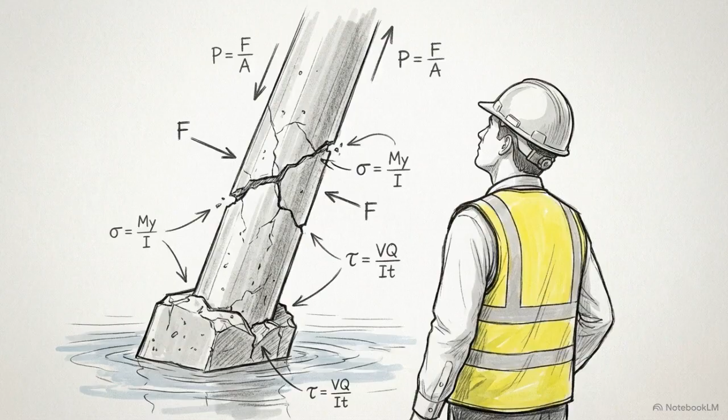When severe floodwaters overwhelm a Thai municipality, volunteer engineers deploy directly into the disaster zone to assess the structural and electrical safety of the remaining buildings. The physical disruption is massive. Whole districts are submerged in highly conductive mud, roads are washed out, and infrastructure is completely compromised.

Parallel to this physical chaos is a strict administrative reality. The Thai Council of Engineers requires its members to accumulate a rigid sum of Continuing Professional Development, or CPD, units. CPD is a mandatory system of education and fieldwork credits required to advance an engineering license from the associate level to the professional or senior tiers. Starting in 2025, that requirement locks in at exactly 150 units.

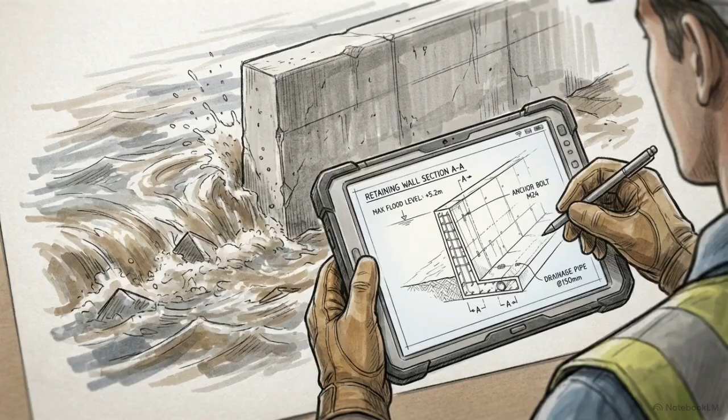That specific number is dictated by international agreements. Accumulating 150 units is the exact threshold required to maintain standing in the Washington Accord and hold the title of APEC Engineer, a recognized international standard that allows for cross-border professional mobility. Executing rapid field diagnostics in a flood zone and calculating bureaucratic CPD multipliers in a portal are two halves of the exact same professional survival requirement.

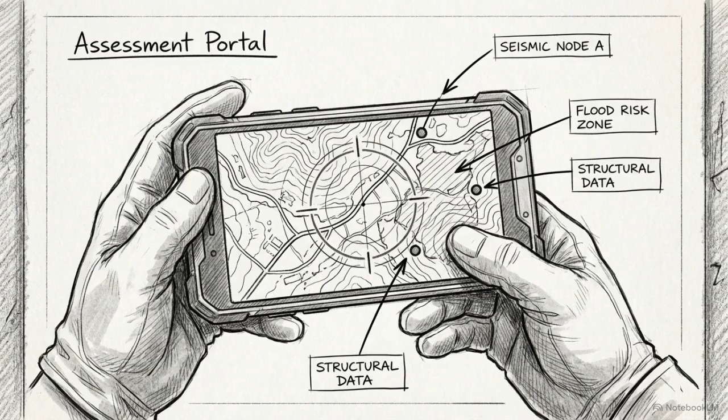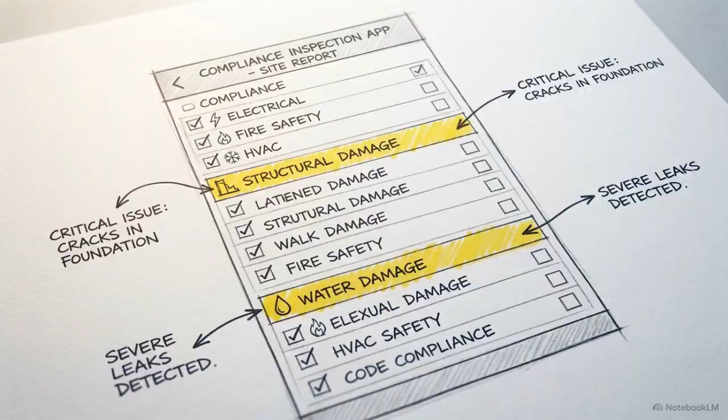Upon entering a compromised area, an engineer's workflow relies on a centralized assessment app. They drop a precise GPS pin, upload photographic evidence, and log the specific visual damage of the structure. The software processes this data into a standardized triage map, assigning a binary safety classification of red, yellow, or green to every surveyed building. This creates immediate friction in the field.

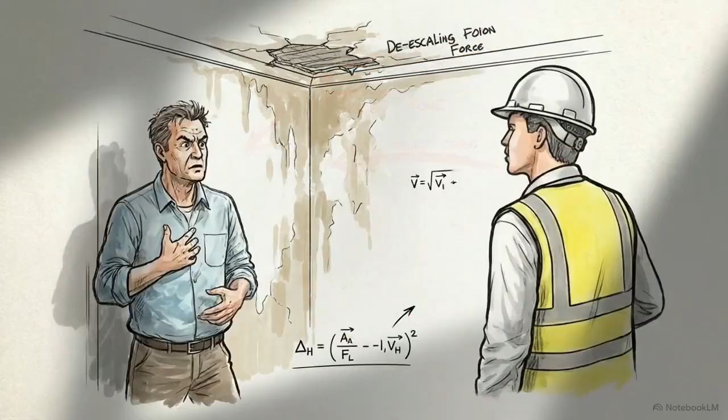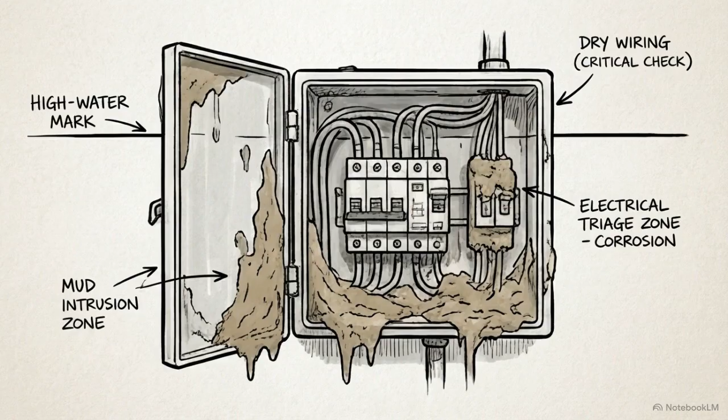As floodwaters recede, like in the recent Chiang Rai deployments, the most immediate threat shifts from drowning to electrocution. The primary diagnostic target inside any residential building is the main electrical consumer unit, which is typically found inundated with thick, conductive mud. This creates a macro dependency problem. The provincial utility company will refuse to reconnect power to an entire street until every single individual consumer unit on that block is cleared and certified safe.

Engineers must manually flush the mud from the panels and perform insulation testing using a megohmmeter. A megohmmeter is a specialized instrument used to measure the electrical resistance of insulators. Only a passing resistance value allows the unit to be cleared. Digital data entry is useless without this physical intervention. The municipal grid cannot function until the hardware is manually secured.

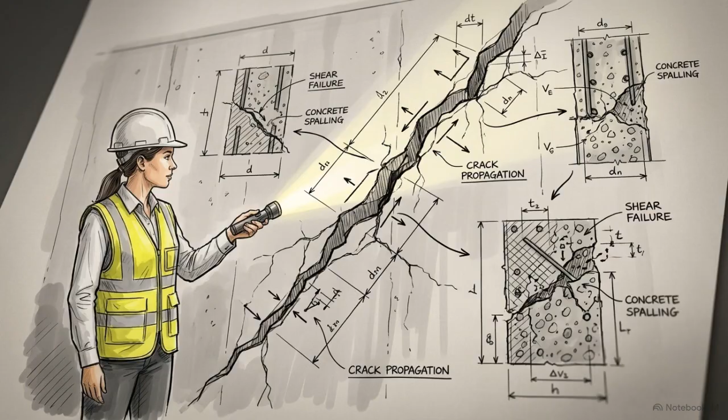Once the electrical risk is neutralized, the triage shifts to the structural integrity of the walls and foundation. Surface cracks in concrete and masonry dictate the hidden failure mode of the building. The orientation of a diagonal fracture is entirely deterministic. It follows strict geometric rules.

Here is how you read the geometry. If you draw a perpendicular vector line outward from a diagonal crack and point it downward, that line will aim directly at the failing foundation element.

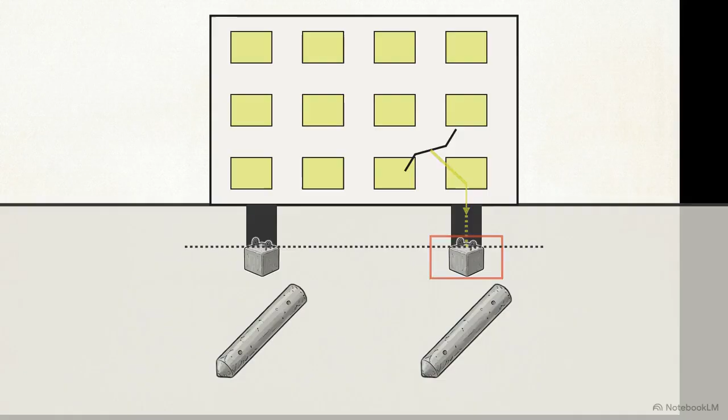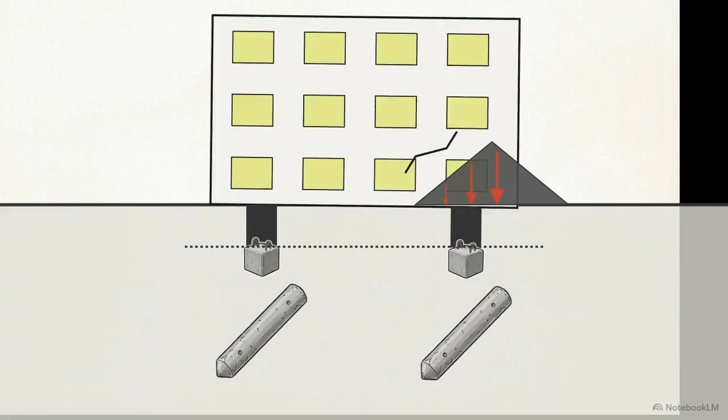In one field case study of a 3-story building, this exact vector analysis pointed to a specific footer, revealing severe differential settlement on one side of the structure. The mechanical cause was hidden underground. A massive, unrecorded volume of sandfill had been dumped over a short 6-meter pile to level a parking area, completely overloading its bearing capacity and crushing it downward. The surface-level architectural cracks act as a direct, readable map of these hidden subsurface failures.

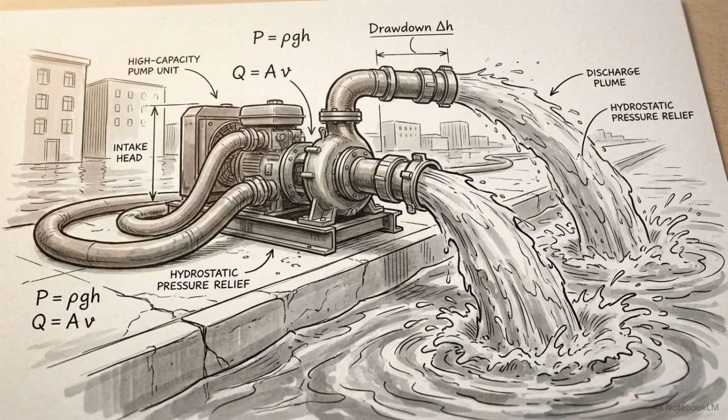The third major failure category occurs outside the building entirely: geotechnical slips along community canal banks. The physical trigger is often the rapid drawdown of floodwater, usually through aggressive pumping. This instantly removes hydrostatic pressure, the outward force exerted by the resting fluid, causing the heavy, saturated soil to flow outward into the empty canal. The primary visual warning sign is the sudden appearance of longitudinal tension cracks on the asphalt road surface, running perfectly parallel to the waterway.

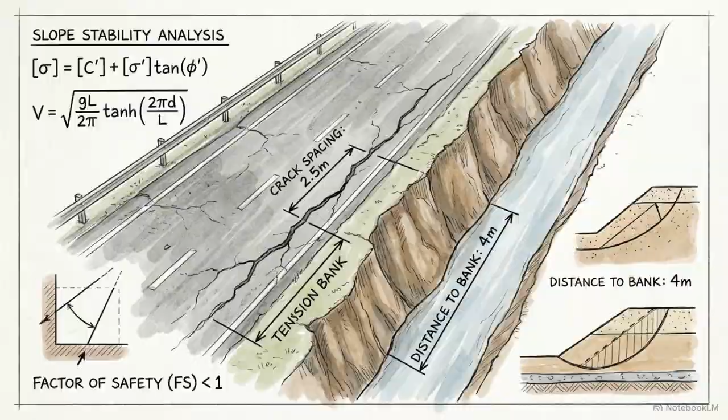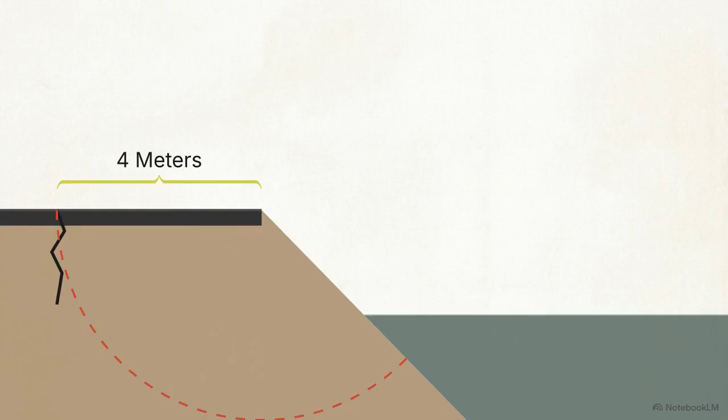This diagram shows the geometric rule for emergency remediation. The exact horizontal distance from the tension crack to the canal bank represents the depth of the impending slip circle in the soil below. This surface measurement dictates the absolute minimum length required for remedial timber piling. If the crack is 4 meters from the edge, the timber piles anchoring the sliding soil must be driven significantly deeper than 4 meters to intersect the slip circle.

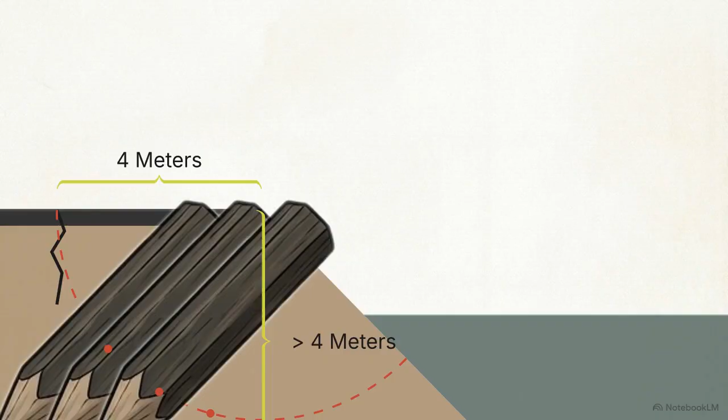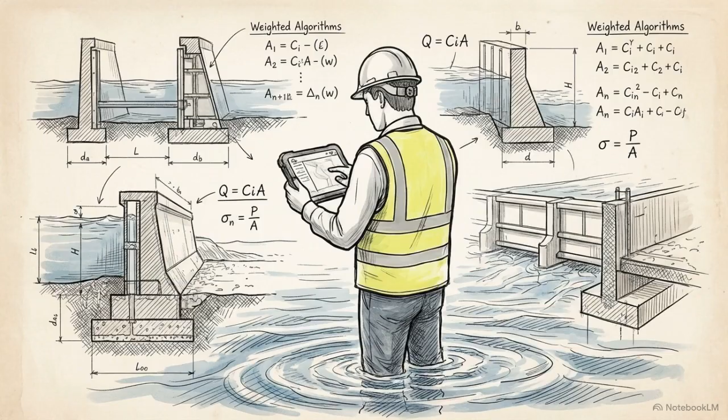An engineer's core value during triage lies in translating chaotic physical symptoms into precise mathematical safety countermeasures. All of this grueling disaster volunteer work must eventually be translated into the mandatory CPD units required for a professional or senior engineering license upgrade.

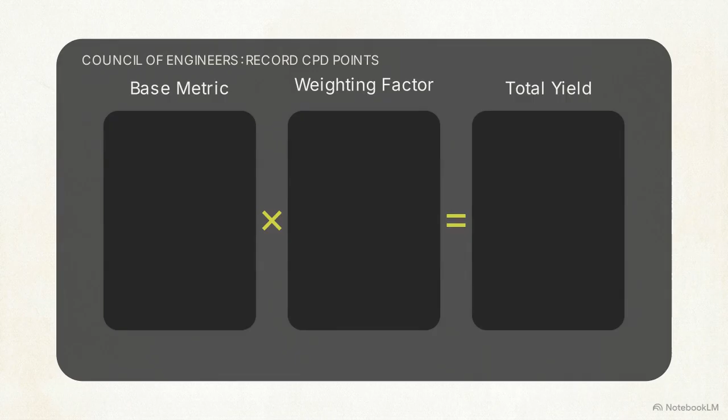The Council's core algorithm multiplies a base metric by a weighting factor to yield total CPD units. For disaster volunteer work under CSR, the base metric is actual hours worked, receiving a 2.0 weighting factor. 24 hours of field triage yields exactly 48 CPD units.

This aggressive multiplier contrasts sharply with Category 508, project management, which mathematically ignores actual hours worked. The project management algorithm uses a fixed base of 5 units per project, multiplied by a 2.0 weight. This creates a hard cap of 10 maximum units per project, regardless of whether you invest 50 hours or 10,000 hours. The Council's algorithm evaluates administrative project responsibility vastly differently than physical volunteer labor, requiring engineers to be strategic about how they log their time.

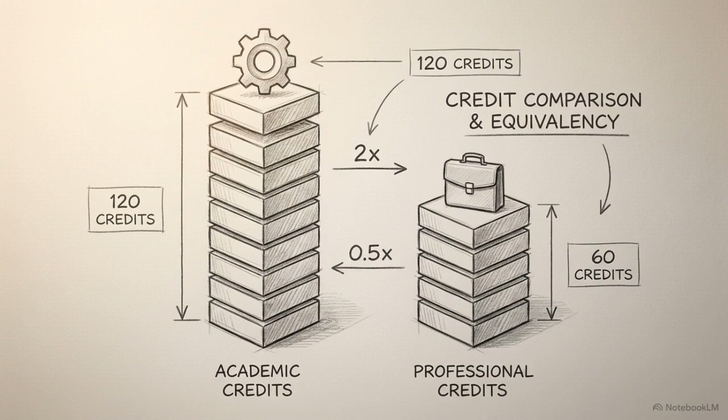This logic also applies to Category 101, formal education, determining how academic degrees translate into points. For a master's degree, the calculation takes the number of registered credits, multiplies them by 15 hours, and then applies a weighting factor. This graphic illustrates the split. Engineering degrees receive a full 1.0 weight. Non-engineering degrees, like business or law, receive half the value with a 0.5 weight.

This logic carries over to Category 102, professional training and seminars. This chart shows the distinction in the calculation. Simple attendance yields a 1.0 weight based on hours. Passing a concluding exam instantly doubles that weight to 2.0. The overarching CPD algorithm is designed to mathematically incentivize verifiable competency over mere attendance.

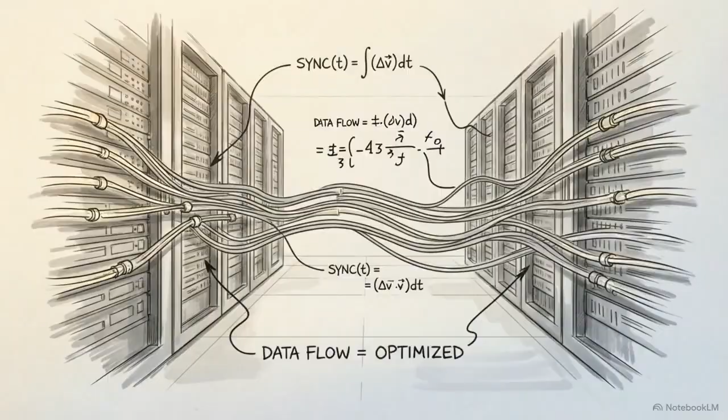The final administrative hurdle is successfully inputting this calculated data into the Council of Engineers portal. There is one exception to manual entry. Activities hosted directly by a core organizational network, an Ongon Mekai, will sync to an engineer's profile automatically. For all other activities, strict authentication applies. Logging in requires possessing both your national ID number and your council member number, followed by OTP verification.

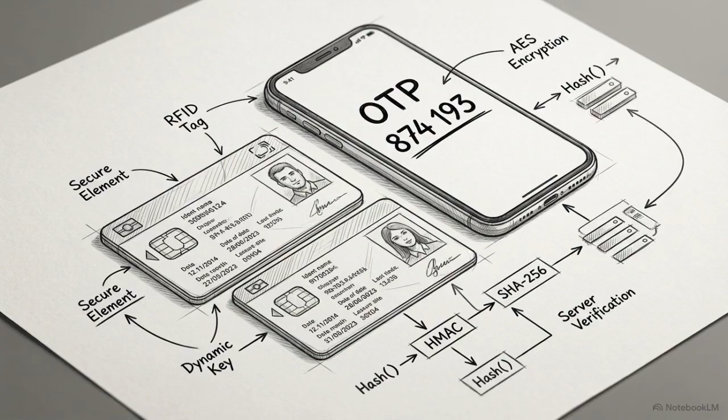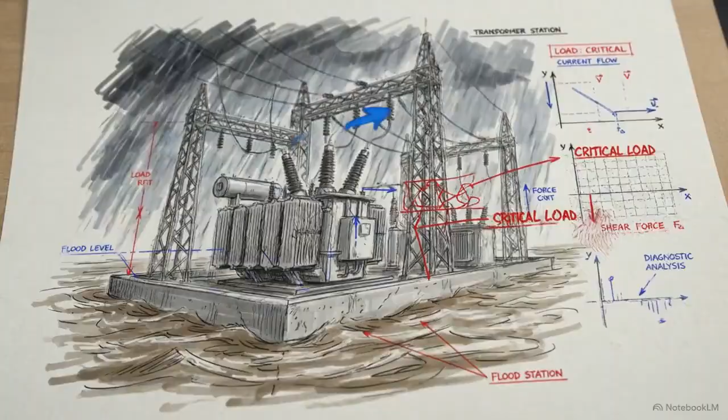Once inside, the UI is specific. You select Bantuk Kanan CPD to manually record points and Dirtsop Kanan My CPD to audit your current progress toward the 150-unit goal. The 150-unit CPD standard serves as the ultimate verifiable ledger. It mathematically proves that a Thai engineer possesses both the diagnostic rigor to assess a flooded municipal grid and the continuous technical evolution required to hold international APEC status.